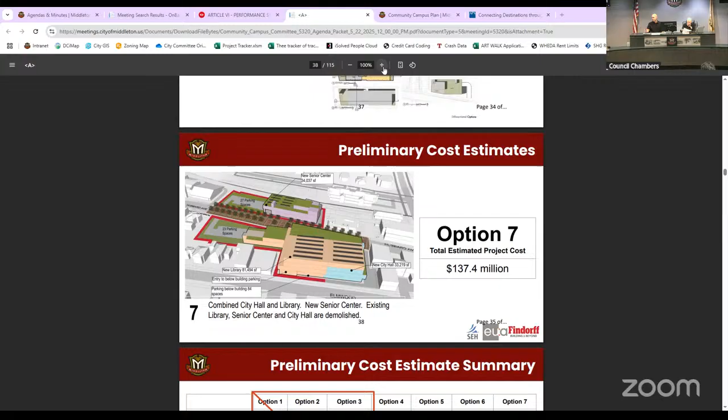I'd like any feedback on the chart with the low, medium, high ratings, or specific comments on any of the options. Note that option 7 was not part of our last meeting. The consultants put that in as part of a request from the committee as a whole, so they did see it, but this option was not presented to us last time. So is there any comments regarding any of the options, or particularly the 3 options that staff has recommended to put forward? This is staff recommendations. We can certainly recommend the same as staff, or recommend our own.

So does anybody have any comments on that? Because at the end of the day, we would like to be able to send to Common Council a recommendation.

I still wonder if we should have an 8th option, having senior center and library together. I still feel like that would be a good idea too. Yeah, I think previously we've had pushback from the senior center that wouldn't be ideal for them, and I think that's why that was taken off the table earlier.

But, sorry to interrupt, Jocelyn had a comment about security, with a preference for City Hall to be with the library. I liked your comment. I'm wondering if you could repeat that, just to help everyone understand why you think that combination is better than the library and senior center, which I thought was going to be a better option as well.

Sure, I think there's a lot of pros and cons to both. When we look at day-to-day operations and where we want to maximize our impact in terms of access to those resources for residents, the library is already open until 8 p.m. When we're looking at staffing a building in terms of safety and security, this building, for example, after hours meetings, especially ones that happen in conference room B, it's not a secure building.

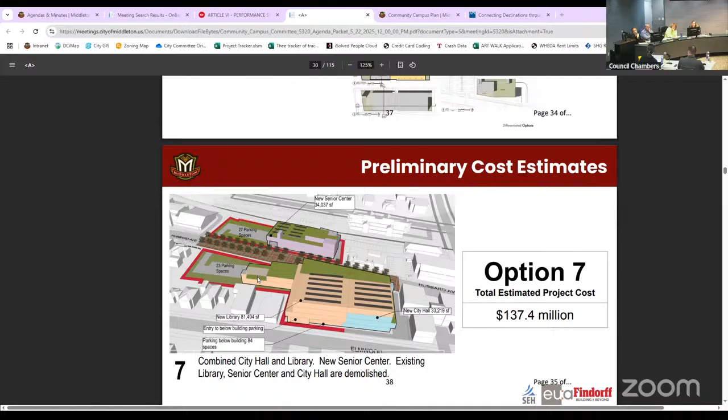The thinking among at least some of the staff members was that the library building, through the MEP analysis, has its deficiencies, but when you look at that building compared to the other facilities, it wasn't quite to the level of the city hall building in terms of needing significant upgrades.

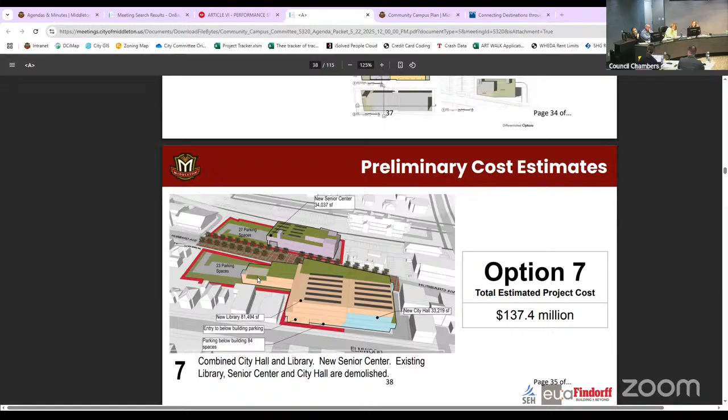Given how that library is constructed, with open and wide spans, it could be retrofitted and renovated. So we thought, why would you take down that building and then put up a new building that's around the same size? We were concerned about how the community would perceive that, thinking the library is in decent shape.

Could I ask a question to the committee? Let me ask it a different way. Of the 3 options that have been recommended, are there any reasons why we wouldn't want to recommend them as the 3 options? Does that make sense?

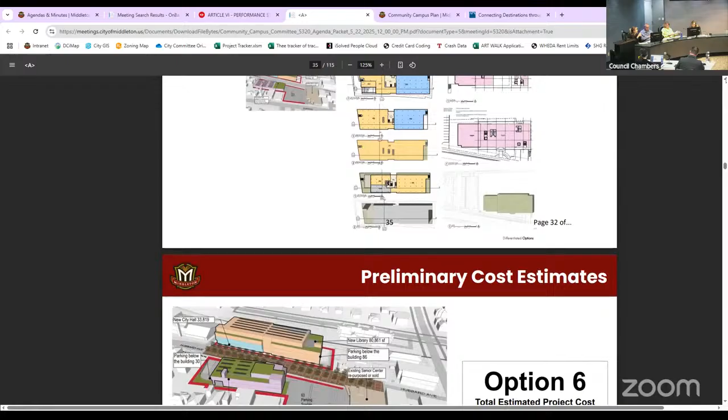To me, option 5 is not viable just from the consultant analysis of this building. Even with an addition, remodeling it does not seem feasible. To me, options 4 and 6 are the only feasible options here.

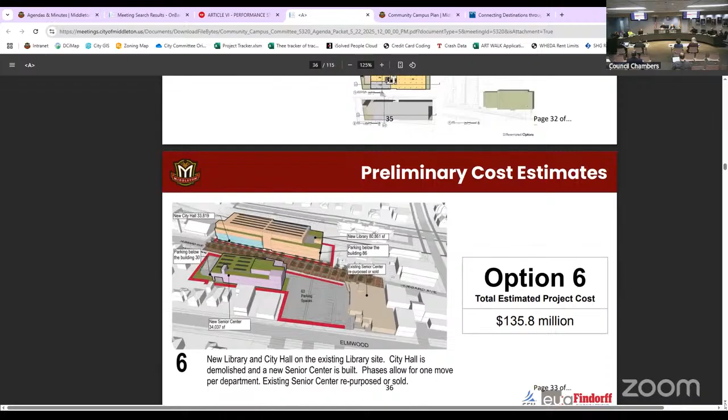I agree. And just a comment on option 7: yes, you could go underground with parking under the senior center, but that's going to drive your costs way up, and that's already the highest estimate in this packet.

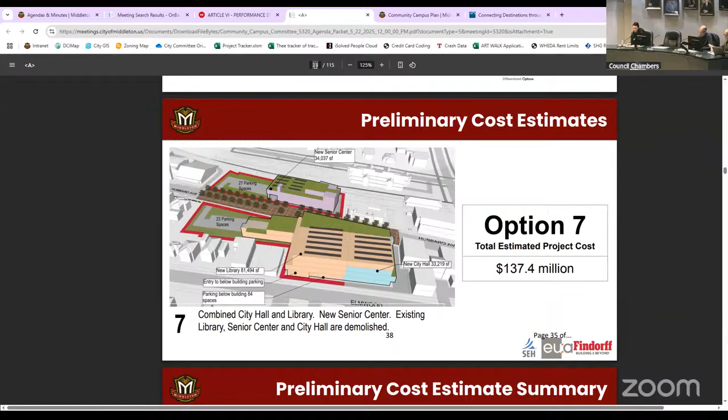I will note, personally, a preference for option 6. I think that gives you the best ability to phase, because you're keeping that old senior center building, and that way, as you go through construction of whichever building gets built first, you have the ability to use that other building for whatever you need in the meantime. I would anticipate that would be the least disruption for all of our department needs.

I would add that option 7 is actually very clean as well. It provides a new senior center in the existing library parking lot, moving them over, demoing the existing senior center, building the new building there, and moving everybody over. Everybody just moves in that scenario as well.

Yes, several of them are noted as a 1 move per department, but the thing that option 6 offers that option 7 doesn't is that there's an empty building at any point in the phase. So whether that's storage or programming needs, that allows for that much more flexibility in the city's plan, and we all know that schedules get interrupted as construction goes on, so that's kind of a fail-safe as well.

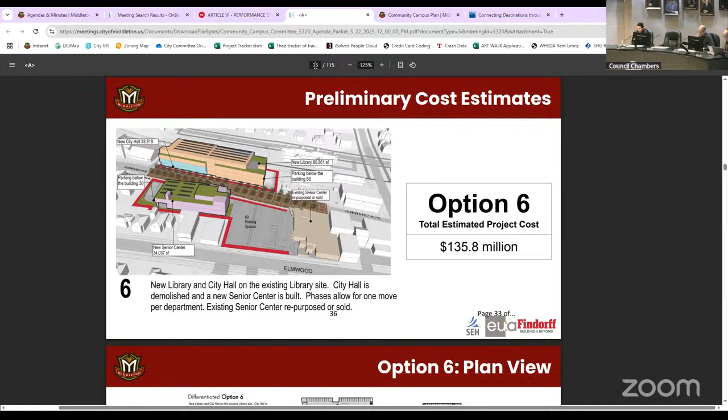Any other comments from anyone?

I think I tend to agree that option 4 is probably the better, preferred option. It's a question of how many options we want to provide the common council at this point.

Common council, how many options? I think 2 is reasonable. It narrows things down enough but still leaves room for discussion. Did you say 2 or 3? Two.

I tend to agree with options 4 and 6. I also didn't mind option 5, as long as it was truly renovated, but I'm going to take my advice from the architect that that's not a good option, and so go with the pro. So I think I like options 4 and 6. I want to revisit the sustainability goal before.

Just remind myself, or have someone remind me, of why that doesn't get a better score.

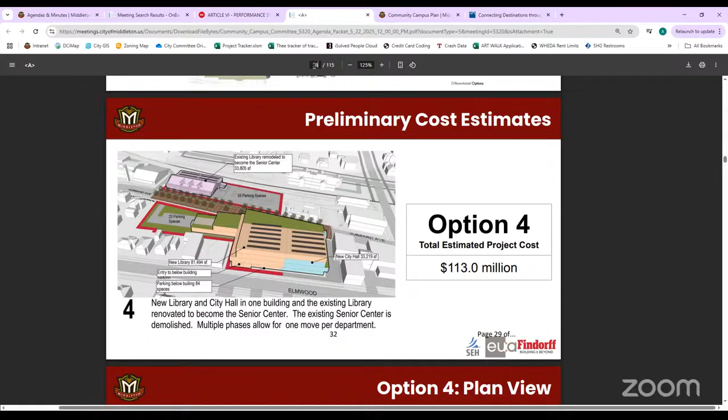Thank you, and I want to add my thanks to everyone else's for all of you taking the time to really grapple with this. This is a vexing problem, and your work has been really important and helpful to the council. Mr. Chair, I appreciate your efforts to advocate for option 7. I know this one was added to just throw some new ideas out there. And going back to Abby's comments about the new senior center in option 7 being similar in size to the current library, which would be demoed...

I'm wondering, what about the option of, if the current library is in decent shape as a building and has the same amount of space as we're looking at for a future senior center, why not consider preserving that building and renovating it and retrofitting it for the senior center? And do the rest of the building in option 7, but not change the south side of the street. I think that would seem to be a potential cost savings, and it could also demonstrate to the public that we're really trying to be good stewards of taxpayer dollars by preserving what we have if we can, and yet still providing the space that we need.

And then regarding the concerns about parking, there will still be underground parking in the new facility in option 7, and I don't want people to forget about that.

We don't have the design, so we don't know how accessible that will be for the businesses to the west. But I just want people to remember there will be parking available, it's just not showing in the images. Thank you.

Just to address your first comment, I think option 4 is showing exactly what you're referring to: rehabbing the existing library into the senior center, and then having a new building to house both City Hall and the library on the north side of the street. Is this what you were talking about, Alder?

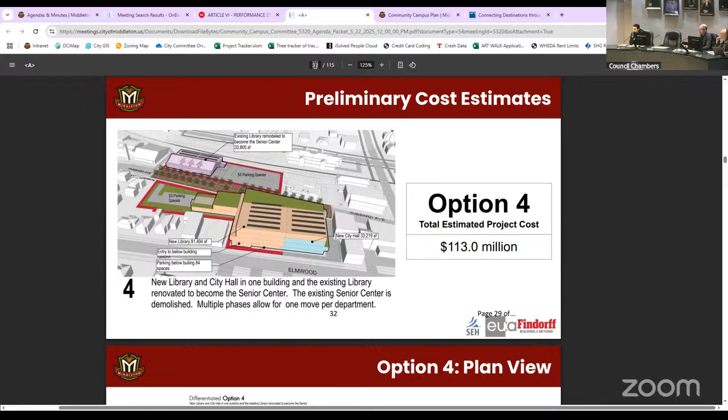Sure, just some additional opinions on why I'm looking at 6 in preference to 7. Parking needs are clear cut in that chart. 4 and 6 have the highest parking. Yes, we could add more parking in 7 underground, but it's already the highest project estimate, and it's only going to drive things higher. Frankly, from the point of downtown businesses, I know we have adequate parking needs, but...

Underground parking tends to be that hidden parking that people don't see as accessible, so being able to keep that adjacent parking lot matters. And cost-wise, this is something we haven't noted, but keeping that existing senior center, don't forget there's an option to sell it or repurpose it for additional revenue for the city. That's only going to take the total cost down when we look at net impact on finances.

I know there's been a lot of debate about the transition from the neighborhood. While it might seem like a better buffer to locate parking lots on that west side for option 7, I feel it's hard because where the entrance is, there's currently streetscape without accessibility to those entrances. From having personally done parking studies, I'd think it's going to drive even more traffic coming from the direction of the neighborhood, so having those lots on the other side probably would have less impact on the residents overall.

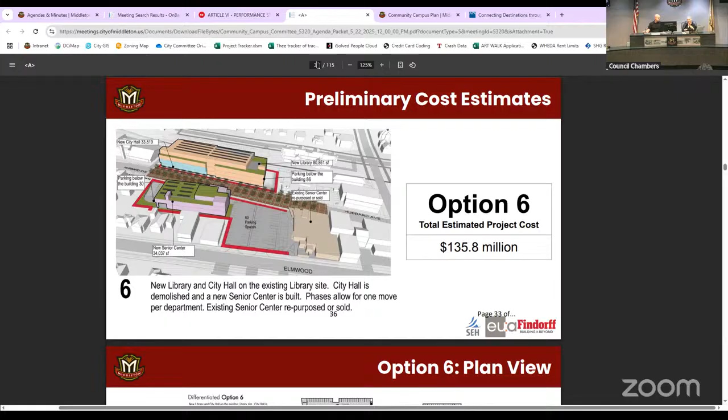For discussion, I move that option 7 go forward to the council. I'll second that. All those who agree say aye. Aye. That's 3 ayes?

Okay, show of hands - I didn't see all that want 7 to go forward. 5 out of 9, is that what I'm reading? Can I get hands for opposed? I guess I am - 4. Motion passes 5 to 4.

So, motion to propose options 4, 6, and 7 to go forward to common council. I'll motion that. Any second? I'll second. All that agree say aye. Aye. Any opposed? Okay, I think we have our motion to move forward.

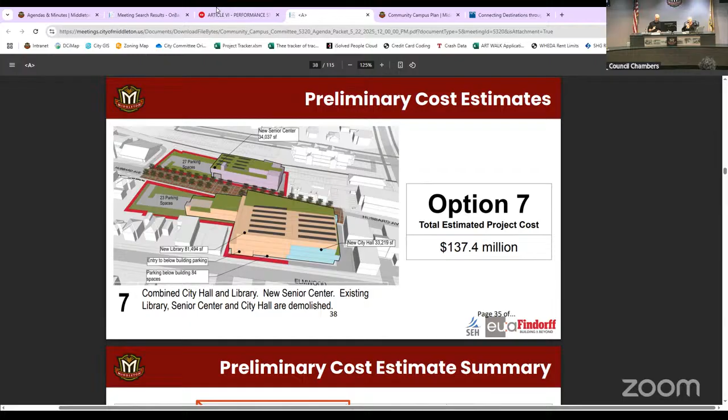Need a motion to adjourn? Thank you to all, thank you staff. Yeah, motion to adjourn. Motion to adjourn. All right, well, you want to get out, don't you? Thanks. You knew that. We gotta get out. Where's your office at?